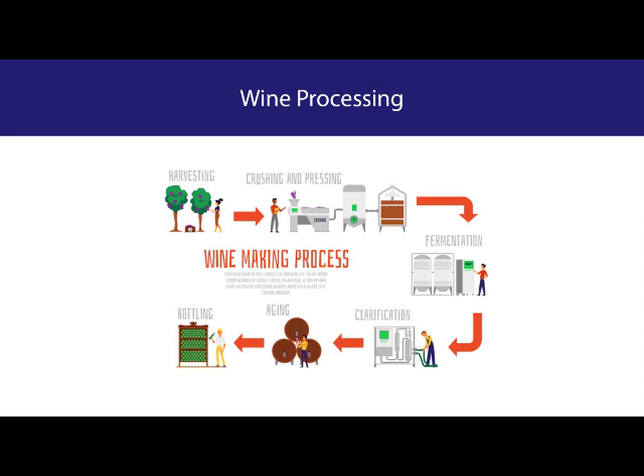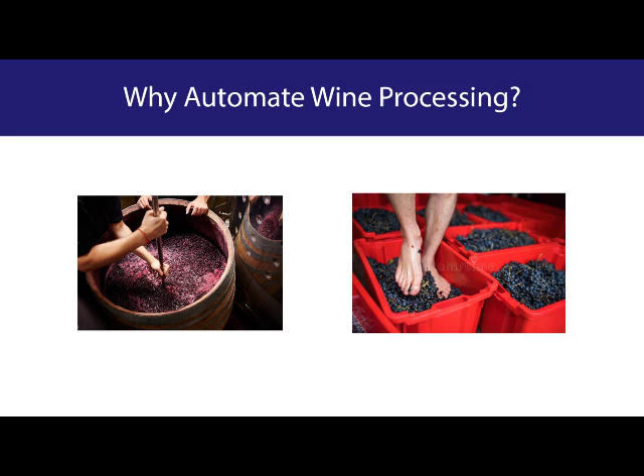Wine production requires grapes to be crushed to extract the juices needed for fermentation. Back in the Renaissance period, grape stomping, also known as grape treading, was the primary method for extracting the juices of the grape. However, this process is both labor-intensive and time-consuming.

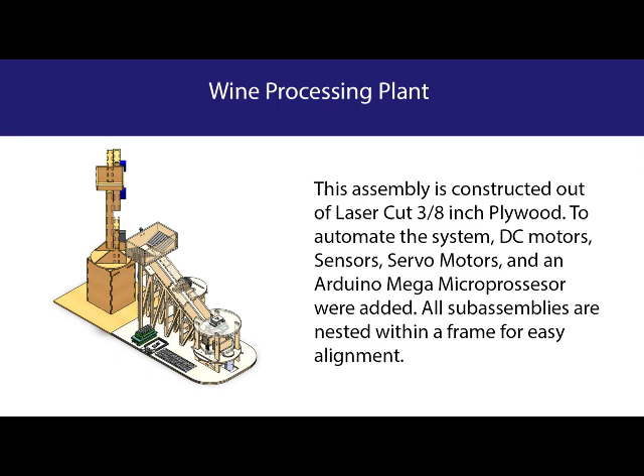The wine processing plant combines Renaissance-era machine design and modern mechatronic technology to both centralize and automate this process. The wine processing plant consists of three major subassemblies. These subassemblies are the crane, the crusher, and the storage area.

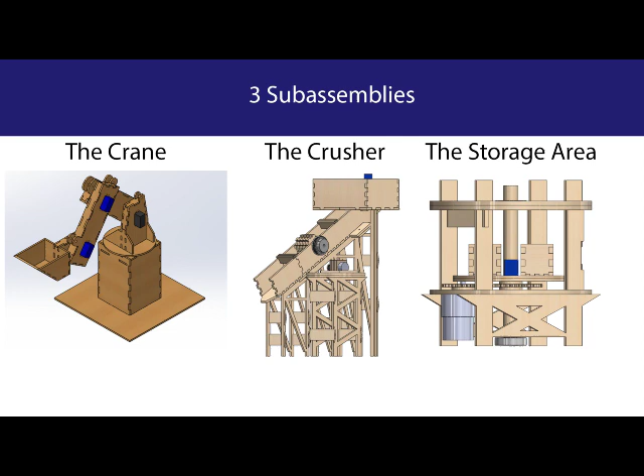They all rely on sensors to send signals to the Arduino Mega microprocessor. This device is able to parse each signal and activate the proper motor to complete tasks.

The crane starts out in a resting position and relies on an ultrasonic sensor to detect whenever there are grapes deposited into the bucket. Once a signal is received from the sensor, the Arduino activates four different servos to move this load into the input chute of the crusher. Once the crane has been in position for a couple of seconds, it moves back into its resting position.

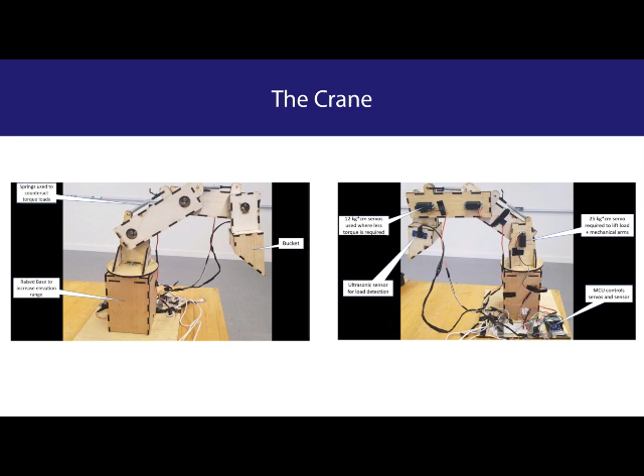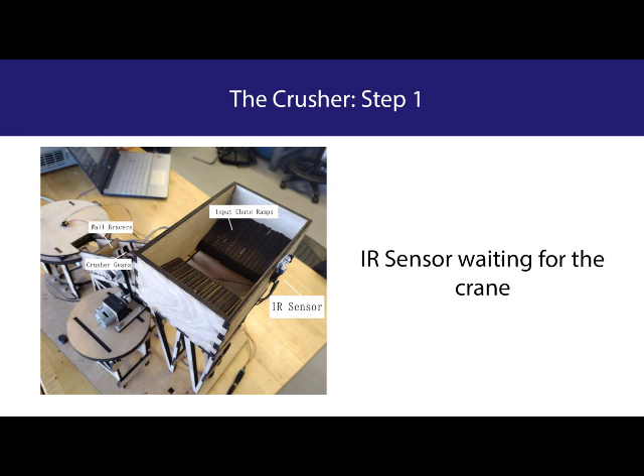The crusher works by sensing the crane bucket overhead with an IR sensor. It is designed to only send a signal once it has been detected for a couple of seconds to prevent false triggers. Once the crane deposits grapes in the input chute, gravity leads them towards the crusher. The Arduino then powers up the crusher made out of multiple wooden blades glued together. Once the grapes pass through the crusher, they roll into the storage area.

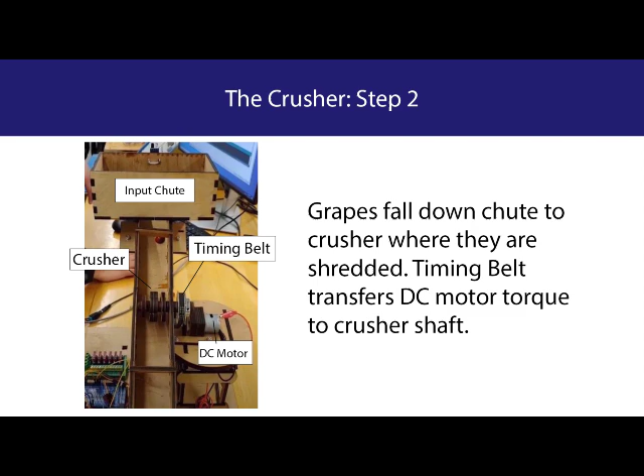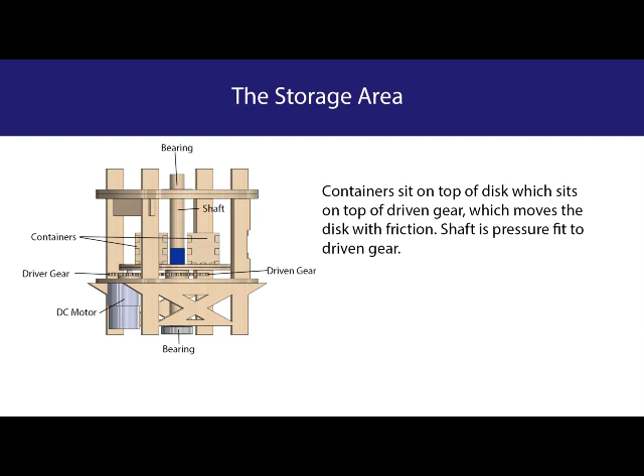The storage area houses containers which sit on top of the disc attached to the shaft. The shaft spins because it is connected to a DC motor via gears. The frame is designed to prevent the torque of the motor from bending the frame and shifting alignment. Wiring the spinning subassembly was achieved by using a spinning wire harness. The shaft is also hollow, which allows us to feed wires through to the hall sensor.

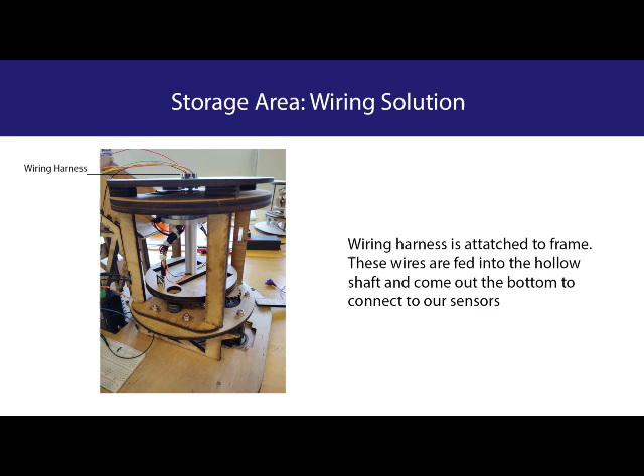The storage area is able to detect when the containers are sufficiently filled by using an IR sensor. Once enough grapes have been deposited into the container, the IR sensor sends a signal to the Arduino to activate the DC motor. The DC motor only stops once the hall sensor is activated via a magnet. The Arduino then cuts power to the motor and the shaft stops spinning.

We will now conclude with a demonstration of our system.